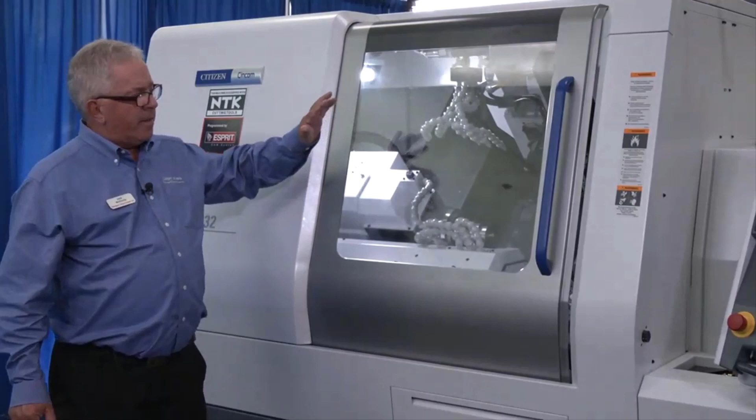Good morning. My name is Jack McGinnis with Marubeni Citizen out of Southern California. I'm here to talk to you today about Citizen's brand new model M32 Type 8 machine. The M machine has been around since the mid-1990s. For those of you who have been around for a while, the first thing you'll notice on this machine is a much larger machine. I'm going to go through some general features that are new and different from the older machines, and then we'll get into more of the concept of the machine itself.

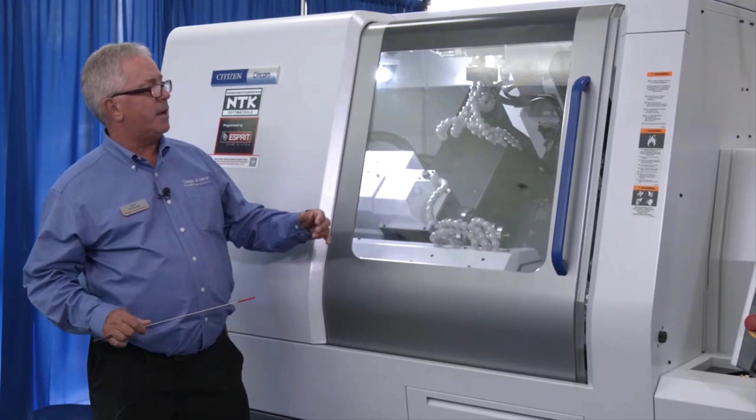The first thing you'll notice, again, much larger machine. Machine weighs about 9,500 pounds, much larger casting, much heavier than the old machines, allowing us to get into much heavier cuts and stability for nicer finishes when we're machining components. The other first thing you'll notice right out of the gates is a much larger door to access into the machine, allowing us to hit all sides of the machine very easily.

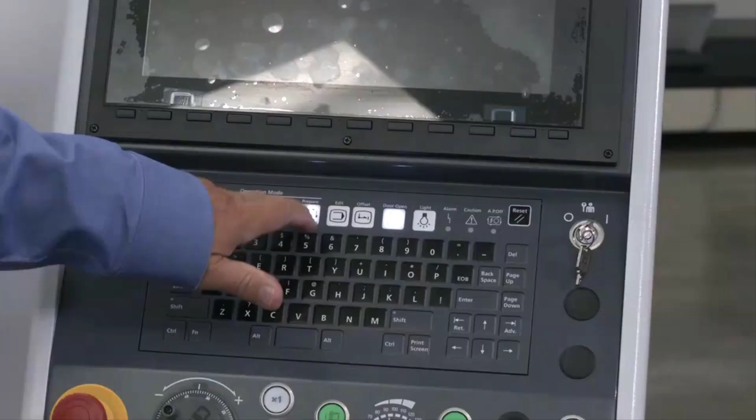In addition to that, our new turret now has a tang drive for the live tools, in lieu of the older gear-driven heads, gear-driven tools, allowing us to drive more power into the tool, getting more aggressive cuts. The control is a new Mitsubishi 850 control. It offers us a touch screen so we can get around in different areas and depths of the control much easier. Pictures, and again, very good access for our operators, much easier to do.

The M machines, as all Citizens, are sliding headstock machines. I think most of you are familiar with the Swiss type. Our headstock in this machine has 12.5 inches of stroke, meaning I can get long, thin parts machined on this machine, and we're going to go through some of the aspects of that as well. So we have a sliding headstock, outboard. I'll bring you in here a little bit.

We have our guide bushing, which is a support bushing. Again, we call it guide bushing. So we tighten that up around our material. And our tools off our gang block are set about 80 thousandths away from the face of that guide bushing. So we've got a very rigid setup. No deflection when I'm machining and turning.

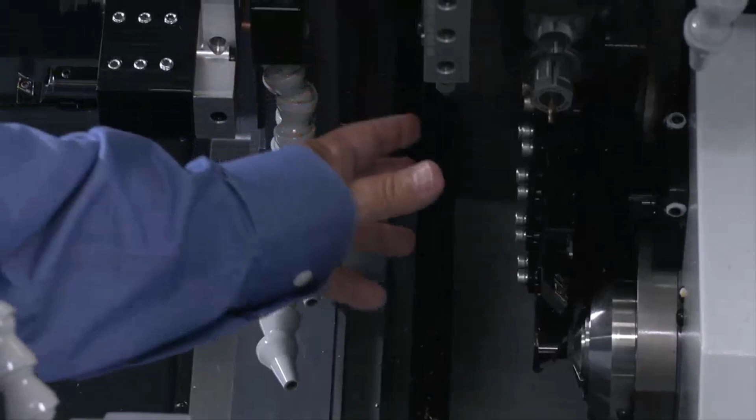On the gang block, we can put turning tools, grooving tools, knurling tools, back turning tools, cutoff tools up on this block. Now this gang block moves in what we call a Y-axis, and then up and down an X-axis. So we obviously have the Z-axis headstock, an X and a Y, so I can face, I can turn, do those types of operations. In addition, if I can bring you in here a little bit closer, we have X-axis live tools on this machine.

We have 4 standard. So again, with my Y-axis, I could have material sticking out here. I could simply walk across a part with the live tool, creating a flat. I have full indexing on this, on the headstock, so I could machine a square or a hex if I needed to.

In addition, with my Z-axis and my Y-axis, I can come down with an end mill, and I can G2. I can circle interpolate a boss on a part. Or if I had drilled a hole, I can go into the hole, and I can true up that hole. Really a full machining center capability up here on this machine.

So I've got my stick tools, we've got our live tools, and in addition, on the gang block up here, I've got a 90-degree head with 4 live tools facing front, 4 live tools facing back. This 90-degree block has a programmable B-axis, full B-axis. I can program this to any angle. So if I had angle holes, if I had angle flats on a component, I could certainly machine that.

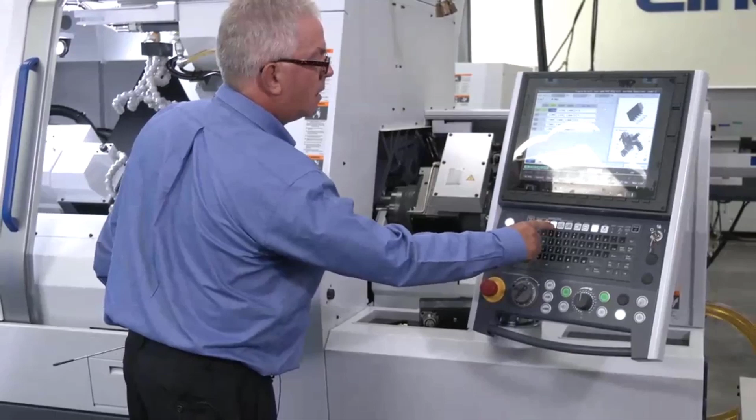This may sound somewhat complicated. I've been with Citizen since the early 1990s. Citizen's done a very good job at this over the years. They have simplified the programming of all this. I'm not going to get into a lot of detail, but we call the front side, the axis I just spoke about, $1. If I could bring that up. My main program, $1. Richard will get more into that in a few minutes.

In addition, on the M machine, we have a 10-station turret, live tooling capable on the front or on the back. We can put turning tools on this turret. We can put ID tools on this turret, facing the main or facing the back. The turret, in addition, if you wanted to load up for a family of jobs or many jobs, we have half indexing capability on this turret as well. So we have tool holders that have half index positions, so I could have ID tools off center, off half index, and really load this thing up if I wanted to.

With all that said, this turret has its own Z-axis, a Z2, has its own X-axis, up and down, and has its own Y-axis, giving us full machining center capability on this as well with our live tools. So I talked about $1. The turret is now programmed as $2. Very simply, what Citizen does, our cutoff face on our material is Z0. So we touch our tools off to the OD of the stock, and any of our ID tools off to the face of the material. The machine knows where that Z0 is. It also knows where all the tools are.

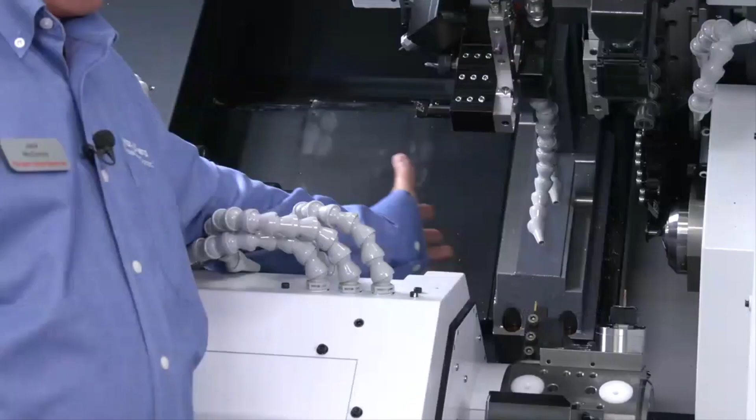I can then turn, I can do any machining center operations, milling, whatever I needed to do. I can then come in, move forward, grab the material with my subspindle, cut off, and I could use the tooling on the back side of the turret, ID, OD, live, or if the turret is tied up at the front, I've got additional stations up on top here. There's 3 stations, all live tool capable.

On the front here, we're showing a 90-degree live head, 3 positions. We can set that at an angle if we wanted to and do angle milling, angle drilling. We don't have a tool in our center, but I can put stick tools in here. I can put live X-axis tools in here. And in the back, we've got a 90-degree static block as well. So again, I can give you extra tooling capability on the back here, so I can separate my subspindle out and give you free time machining in the back.

So this machine is actually a 12-axis machine. Again, if I take a look, Z1, X, Y, B, C, Z2, X2, Y2, and Z3, X3, Y3, C-axis on the back. But again, Citizen's software, the architecture, simplifies all of this. We program to each section, and the machine knows where the faces, the cutoff faces are when I'm in the back spindle as well. And we've touched the tools off. The machine will take care of all those calculations for us. So that's basically how the M machine works and how we can process parts through it.

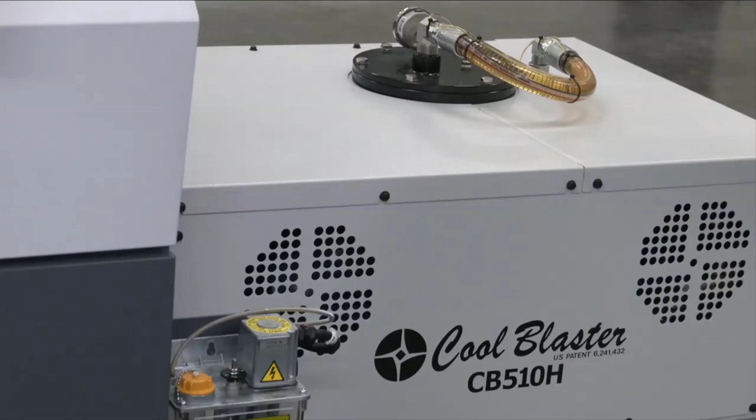We offer high-pressure coolant pumps. We've been making high-pressure coolant pumps since the mid-1990s. These have developed over the years. We now have 10 line pumps, 2,000 PSI. It's got its own PLC. We interface this back into the machine control. You can turn these lines on and off through your program, making it very, very nice and simple. We can bring those high-pressure lines into different areas of the machine.

Our gang blocks now support the high pressure, where we can now put tools in, and there are many tool companies, but NTK now supplies, I don't know if you can see this, guys, take a quick look. We can put coolant right in through the tool holder itself and have high pressure coolant come out right at the cutting tip. That offers good chip control, and it offers good lubricity on the cut. So again, we're trying to control that process.

So if we've looked at a component for you and we give you a 45-second cycle time, a 2.5-minute cycle time, whatever that might be, we want to control chips. We want to clear chips off of drills. We want to clear chips off of maybe our turning tools if things are getting balled up a little bit. We can do that with the high pressure.

In addition to that, if I've drilled a hole in the main side, in the front side, and I come in and grab it with my subspindle, cut it off, and I've got it in the back, and I'm working the ID on the back, potentially I'm packing chips back into the subspindle, which may eventually cause me a problem trying to close that collet. So standard on the machines, we've got a pneumatic line that comes through, we blast the air through.

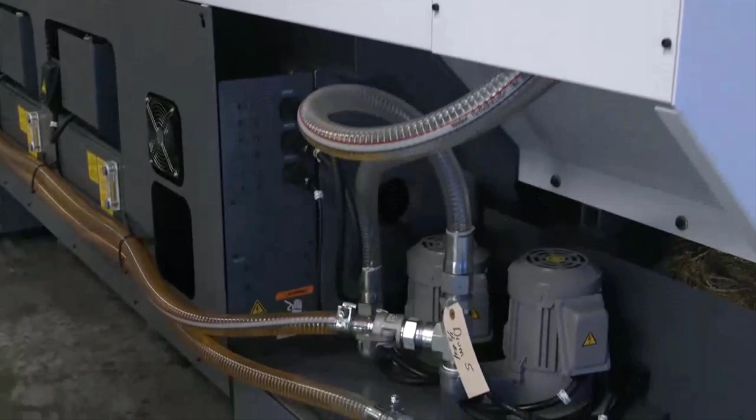In addition to that, we have standard 2 flood pumps in the back. Again, getting good coolant, good oil throughout the whole machine. We have that in conjunction, certainly, with the high pressure coolant. And a little further up, we've got 2 heat exchangers, one for each spindle. We want to keep the machine stable.

Again, we've got a big casting for stability and for aggressiveness, but we want to maintain the temperature of the machine, and we can certainly do that. Citizen's done that with our heat exchangers back here. Walk back around the front.

A couple other things I want to talk about, and this really relates to our entire line, not only the M machines. Citizen has done a good job over the years looking at applications and coming up with solutions. One of the things we offer are high-speed spindles, high-torque electric spindles. Again, we've been doing this for many, many years. A lot of tiny little medical parts we can get in, small little hinges and whatnot. We can get up to 60,000 or 80,000 RPM spindles.

These are listed on our price sheet as, if this makes sense, a standard option. So we've got them all set up. We have the interfaces all done. So we can just implement these with the tooling blocks to hold them and put them on the machine. You can buy these in the future as well on any of our machines if you have a need.

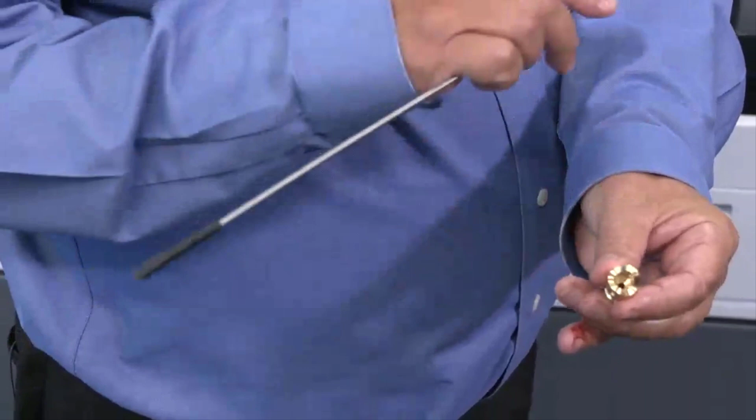With that said, we're going to show a video of a part. Where am I going here? Right here. We actually have a wave on this, and this is actually going to be a 5-axis move. Not many other machines of this nature can do a 5-axis move. We're actually going to move in C, Z, X, Y, and B, keeping this tool where we need to keep it to complete that wave on this part. So with that said, Richard, you want to go to the video?

As we said, we're going to show you machining a part on the M532. First off, let's show you what it looks like when we're doing a high-speed check function, checking for any errors in the program, such as syntax or G-code errors.

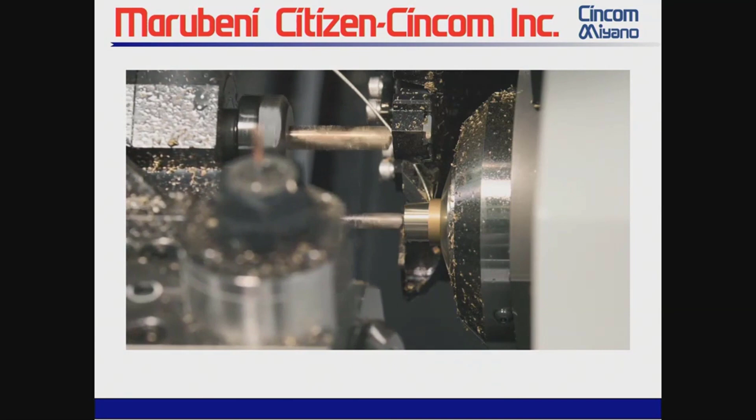We shift now over to doing a face-off move on the machine. Can bring in two tools, an ID and OD tool simultaneously, using axis superimposition, a very powerful function of the Cincom control. Does multiple cuts at the same time. Back tool block is turning the OD of the part, the back side. Bringing the ID tool up to the front side.

While that's going on here, we'll take a look now. We'll see this notching out as a rough notch, getting ready to machine a feature later on in the program. Setting a block on the backside, a live block to drill angled holes, fairly straightforward yet simple process with the Cincom control.

You are doing another roughing out, getting ready to move into the 5-axis machining mode. Drilling angled holes on a Cincom machine is a straightforward process. A couple of simple commands. Your local application engineers can show you how easy this is to do.

Starting the profile with a 5-axis machining, following it around. We start doing a little rough pass first. Come back around and do a finish pass right after that.

And finish that off. Now, something we're able to do, the holes that we're drilling angled on the back side, now we can come up and chamfer them utilizing the gang tool. It's on the front side, so the main side spindle. Maintain absolute positional accuracy. The back block, the B-axis block, can actually rotate 45 degrees on the back side.

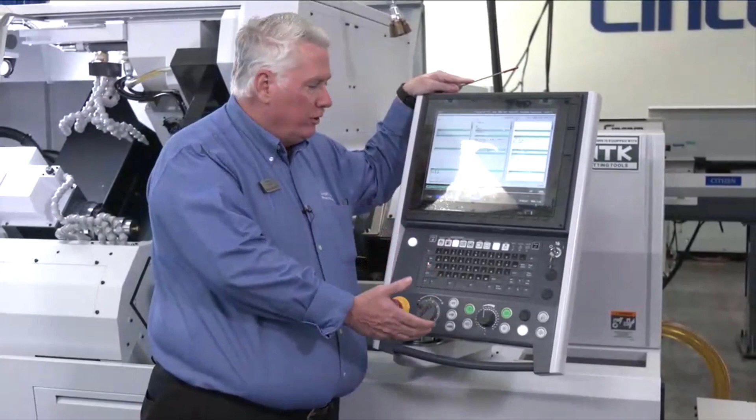Hello and welcome to our event. I just want to go through a few control differences with this new machine, the new 850 control, the Mitsubishi control. What really makes the new M different is going to be the touch control. You can touch between dollar signs very quickly. It's very quick to interact with this control.

You can see on preparation, many of the screens are very familiar with what you're used to on any version M, for that matter. What's going to be a little bit different here is you're going to have more choices as far as the turret. So this machine, the new M, has a tool library. The tool library quickly and easily defines tools that are associated with pockets on the turret. As you can see, the picture is illustrating exactly what turret holder you're talking about in that location.

This is twofold important because not only does it give you a visual representation of the turret holder, but it also defines positions, pockets in that tool holder, so you will no longer be required to put G50 shifts in the program as in past versions.

As Jack mentioned, the new turret tooling for this machine, the live tools are unique to the new M. With previous M32s, the tooling is compatible as far as static tooling and stick tooling that may be required for this machine. However, live tools now use the new tang drive that Jack showed you.

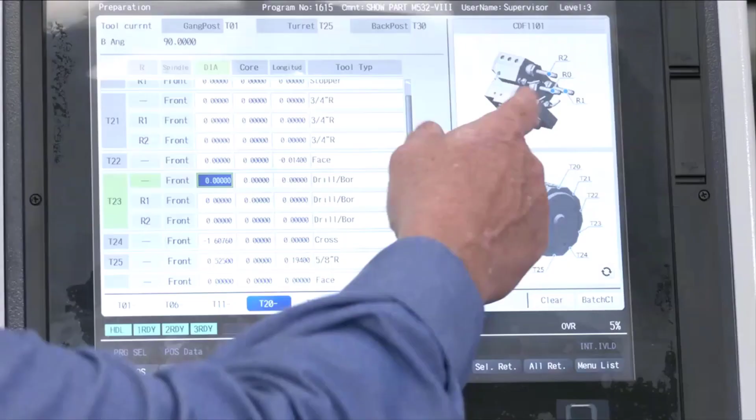As you can see with the new ID station holder, you can see all the designations for the different pockets, different tools. Whatever the tool may be, this is a standard X-Cross live tool. In this screen here, you can quickly identify the tool. You can scroll up the screen.

You can scroll down the screen and identify the tool, exactly what you're working for. At MC Data, many familiar screens on this screen as any Cincom. You're going to have your material OD, your bar stock OD, your positioning point, your cutoff tool. All these are very familiar with previous generations of M. No different with this machine.

Where you're going to see some differences is in here, and you're going to define your tools in here. All the tools in the library you can define quickly and accurately with no mistaking the picture for the tool that you're talking about. This screen is quickly accessed by scrolling through the pictures. You can touch on the picture and it shows you the picture of what you're using.

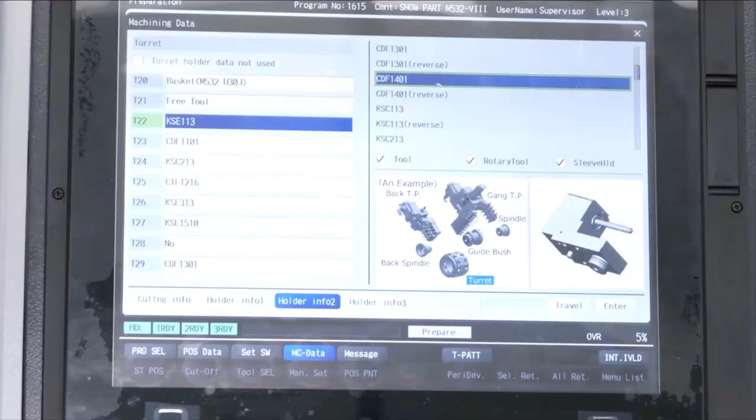The other benefit of this screen is, again, you have no G50 shift. The G50 shift will be put in the tool pattern for you, so you will not be required to put that into the program. As you can see, all the tool holders are defined. So for example, on this tool holder, there is no definition. If you want to use some special tooling you have, or if you do not want to use the predefined G50s in the machine, you can select this page, and this page will let you define the tool as you see fit in the program.

So this information also holds true for the back tools. As Jack was saying, we have this back tool that is set to slant. You have a few options for this tool. It could be set to cross, it could be set to face, slant. You could set the tool to free tool if you have some undefined tool in here, and it will make it nice so you can come up with any numbers you need to set a tool.

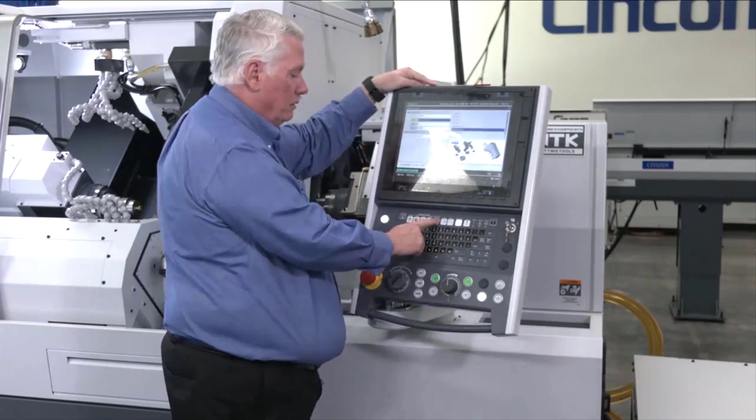As you can see back again in edit, what's really nice about this control, I've spent quite a bit of time on this new machine. We set up this part, but transitioning between dollar signs and placing the cursor is very fast. So I can transition and place the cursor right here, make edits that I need, and transition right to $2, right to $3 with a simple touch of a finger to the screen and make the edits that I need.

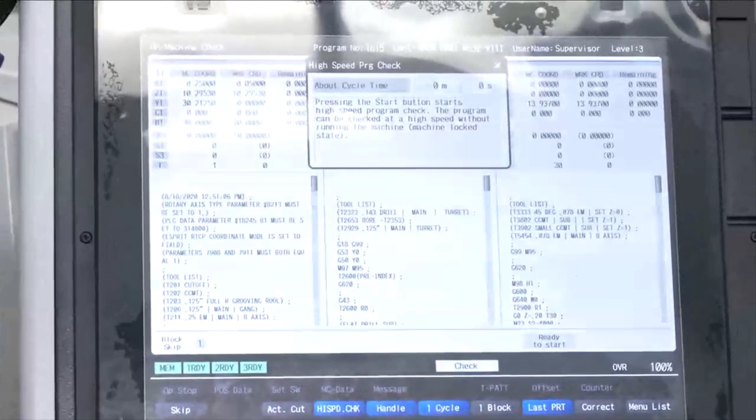The machine is very familiar again in program check. We still have program check, the high-speed check function that is standard on all Cincom machines. As we are familiar with this function, it allows the program to be checked in the background for syntax errors, syncing errors, and various other errors that may be caught prior to actually running the machine. Everybody's pretty familiar with the high-speed check, and you have the handle function. The handle function is the same, and it allows you to crank through the program.

And especially on the M, there's a lot going on. You have $3 signs, you have a lot of axes moving at the same time. So the handle function is very nice to crank through the program. We're going to have another demonstration of that shortly on the L video that's coming up in the live demonstration. But I can't stress enough with the handle, it's very nice to crank through the program.

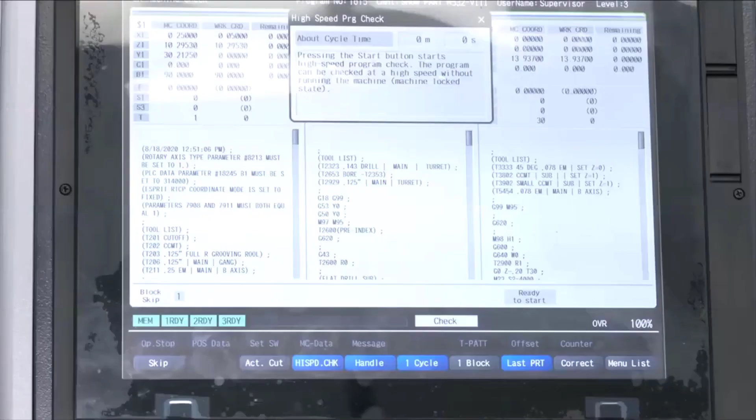You can crank through a spot in the program that may be unfamiliar or maybe coming close to interference. You can actually crank the handle backwards, removing the tool from the interference zone, hit reset, escape out of there, and make adjustments. You can also correct the program on the fly by pressing correct, and this will allow you to make minor edits on the fly. If you see a syntax error, maybe the decimal's in the wrong spot, maybe there's a number wrong, you can quickly and easily make adjustments as you need.

So even though this is a brand new Model M, all the screens are very familiar. All the screens and all the tool setting functions are the same. Still sitting on top of this Mitsubishi control is our Cincom software, making it very familiar to any previous M. If you ran an old M2, M3, M4, you can walk up to this machine and still make it work because all the screen functions and mannerisms are still the same, even on this brand new machine. I really like the new touch screen and the interface because it makes transitioning between screens and the data very quick and effortless.

All the safety built into the machine as far as cranking the handle and cranking through the program make it very nice. So Citizen has, with our Cincom software, we tie the programs together, as Jack was saying, $1, $2, and $3, with our G600 codes.

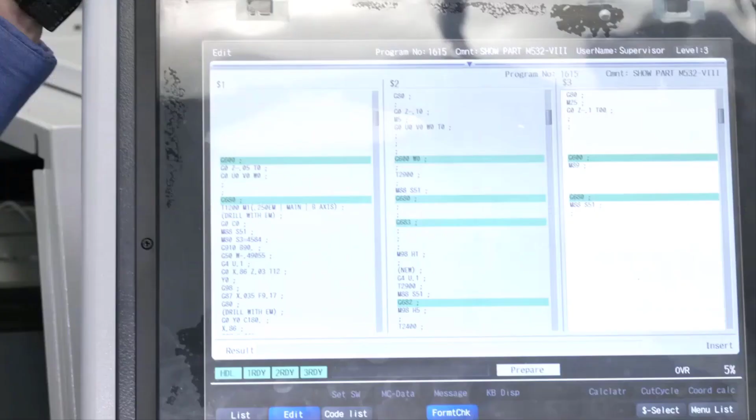So with the Cincom machine and the Cincom interface, the machine excels at this. It makes a very complicated machine with multi-axis very simple to tie these different areas together with simple G600 codes. And as you can see, I can scroll through this program simply by swiping up on $1.

I can place the cursor wherever I want. If I still want to page down with buttons, I still have buttons available that I can scroll down. And as you can see, more G600 codes, G620.

And in this mode with sync display, it makes it very visual for somebody to look at the screen and quickly recognize the programming, how it looks, how it's supposed to look, and make sure that your queuing is set in the proper order. It makes it a very visual, very quick access to the program.

So again, to recap with the programming, with the G600 codes, when we come out we train very well with teaching the codes and making sure these codes interface with the machine correctly and that they're understood. So basically the codes are meant to make the machine have very specific functions at very specific times, to making the machine easy to program, to making sure the machine is doing exactly what is required by using these basic codes.

As with all M's, last part programming is a very good function. As you know, with the Swiss machine, typically when the machine stops, it has an incomplete part in the subspindle. With last part programming, it allows us to complete one complete cycle and make one complete part. You're no longer left with an incomplete part in the subspindle.

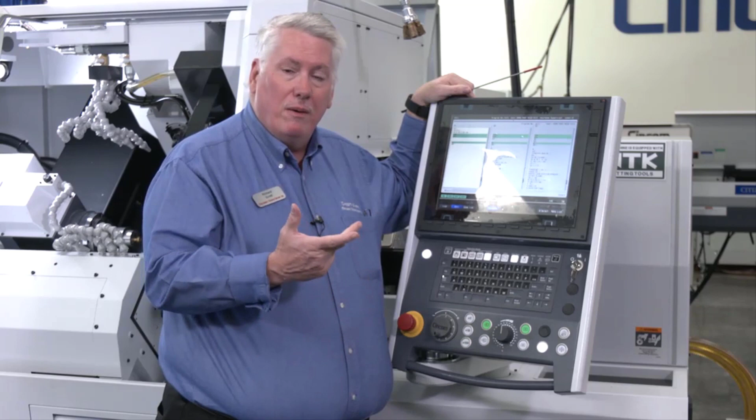So this is a function that we use in our programming technique for programming the M or any Cincom machine for that fact, that we can make last part programming work and you will have a complete product at the end, making setup times faster, making it more productive, and saving money because you're allowed to set up one part, get one part done at one time, one complete product.

A few more screens, back to program check as I explained the high-speed check function. A lot of the other pages like offset are very familiar, and they're also touch interactive. You touch the offset page that you want, you can see it's highlighted, you can make your direct offset to these pages. Very simple. And all the pages here to the side, again, all touch, making it very fast, saving tremendous amount of time transitioning between pages setting up this machine.

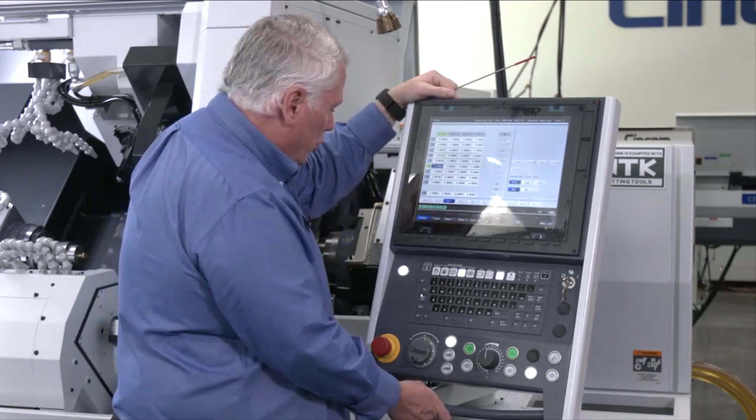As Jack said, the new M is convertible to non-guide-bushing mode standard now. The drive shaft is easily taken off and put back onto the machine, making the machine go into non-guide-bushing mode relatively quickly, effortlessly.

I just want to show you the Tang Drive tool again, because this is the tool that is unique to this machine, to this new M, with the Tang Drive. I was really excited about the Tang Drive system that came out because with this tool in the drive station, it doesn't bleed energy anymore. It's only driving the tool that's in the pocket, that's in the active station.

You don't have drivetrain wear on turning tools that are no longer being used. So you may have the turret loaded up with tooling. However, only the tool that's in the active position is the tool that's turning, saving tremendous amounts of energy and power.

So the main spindle, sub-spindle in this machine are 10 horsepower. The live tools are almost 3 horsepower on this machine. So the machine has tremendous amounts of power, especially with the new Tang Drive. Again, it doesn't bleed energy off as other machines have, and makes it a more robust situation for turning, drilling, milling, whatever the case may be.

So I think we're going to take a few moments now for any questions and answers that you may have. I know Jack touched on the high pressure coolant. If you guys have any questions, it's going to be a good time. I would like to just talk for a minute again about the high pressure coolant. As you guys are aware, typically inside the machine, you have high pressure lines that would be sticking down from various manifolds in this area.

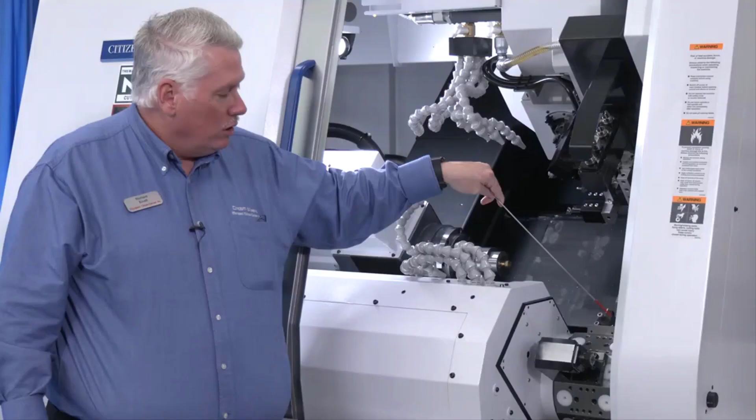Turret tooling has the capability of high pressure through the turret. There's a plunger in the turret that allows direct coolant flow to the individual tools, cutoff tool, some drilling stations, and some tooling through. So it's very neat. It's seamless. You won't even see that it's happening. It'll feed the turret directly with high pressure coolant.

And as you can see, the manifold here for the back ID block. You could plumb high pressure lines through here. You have some ports up here for allowing pressure through. It's a very nice setup, very clean. Allows very easy adjustment to make sure that the coolant is flowing where the coolant needs to go.

So I'm really excited about this new system with the coolant. NTK was a big part of this tooling that we used on this machine to get the coolant through the tools. And again, the pocket where you place your tool has a small hole that lines up with the hole in the gang tool block and allows, again, direct access.

So that also means if you do not have a tool like that, you can still run the manifold as you have in the past to give you direct access to coolant at the tool tip, no matter what tooling you use for this machine.

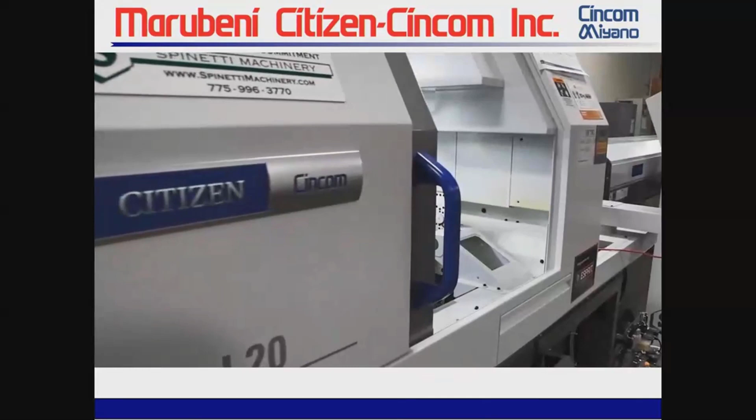Now let's look at today's demonstration. We are pleased to have you with us today as part of the Marubeni Citizen-Cincom IMTS Demo Days for 2020. Today, we will be demonstrating a gear hobbing application on the Citizen L20 Type 10. A little about the machine. The L20 Type 10 is a 20 millimeter machine with a 25 millimeter upgrade option. It has the capacity of up to 34 total tools and has a Y2 axis on the sub for additional machining capability.

Some features of the beveled gear project. We are using a gear hob attachment from Marubeni Citizen-Cincom New England division. We are using the LFV function, or low frequency vibration. That's part of the latest in the Cincom technology. The gear cutter is a special 3-tooth cutter from Gen Swiss.

The goal of the project was to successfully make a pair of identical bevel gears to mate together in a housing designed by the customer. Originally, the customer was making a single gear in 5 operations, whereas we are now making the gear in 1 complete operation.

This project is this beveled gear, which is not a common thing to do on a screw machine. This particular beveled gear, instead of being at a 90 degree, it is at a 57 degree, which is even more unusual to run on a screw machine. This particular beveled gear required us to use this 3-tooth cutter, which acts more like a single tooth cutter than the normal cutter that we would use for a spur gear.

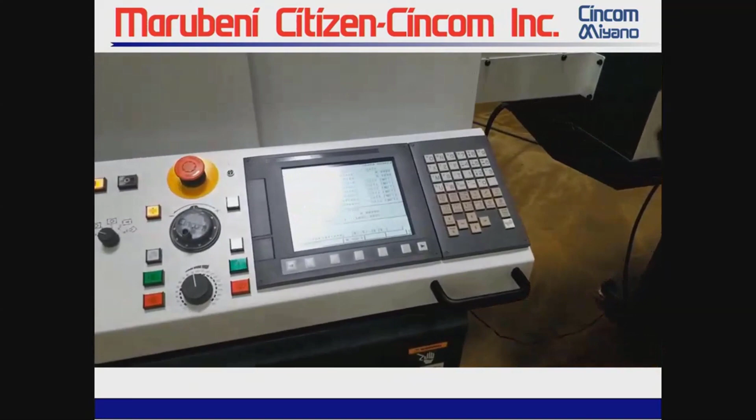Now with this type of information being sent through the program, if the operator or the setup person forgets to send the bar loader info, the information will be sent by program. We are also working on having this information of parts remaining and pusher positioning showing up on our operator screen.

Another new feature that we'd like to add to our bar loaders is last bar sensor. So if the lid is closed and the machine is in automatic and the last bar is loaded into the channel, now with the lid still being closed, we have a warning light blinking that states that there are no more bars left in the bar loader. Please be on the lookout for this option and Ethernet connection between the C320 and the A320 in the near future.

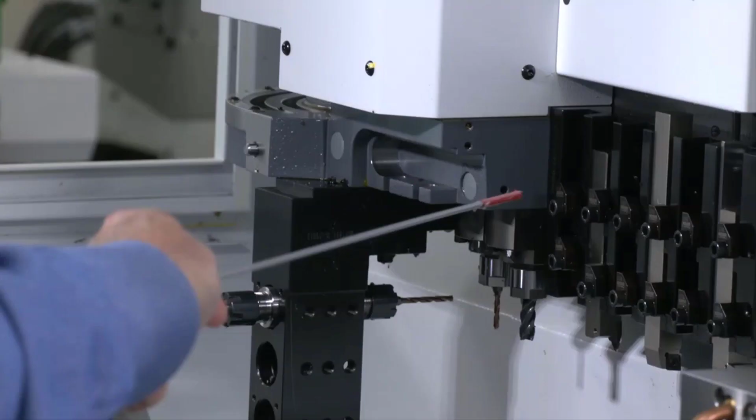Now, the big difference between the L32 Type 8 and the L32 Type 10, which is what we have here, is that as opposed to having driven spindles, we have a back block with 5 positions that are static, so there's no live tooling in the back. We still have a gang slide similar to this, with 6 positions and 5 driven positions.

Over and above that, we have an additional unit on the back, which enables you to plug in what we call a driven dog leg, and that will allow you to put motorized tools and utilize them on a predetermined angular setting, okay, which is done manually. On this particular machine, on the sub spindle, we have a 3 horsepower continuous duty rating motor, and it's 5 horsepower, 30-minute rating, 8,000 RPM.

And on the sub spindle side of the machine, we have an X, Y, Z, and C axis that you can work with, okay? On the primary side of the machine, we have our guide bushing side, which does have positive pressure, which enables you to utilize high pressure coolant without having to worry about any foreign materials or matters getting into the guide bushing itself. We also have 6 turning positions and 5 driven positions to do your cross working.

Now, on the Series 12, everything is the same as this, but in addition, you will have a programmable B-axis on the very back side, and I'll show you where that comes in a second. I'm going to do a brief walk around on the machine. Let me first start by saying the casting is big, rigid, and thermally stable. We have hardened ground ways, and we have roller packs on those. So the end result is a machine that is extremely quick, accurate, and thermally stable. We're traversing the axis at a rapid rate of 32 meters a minute.

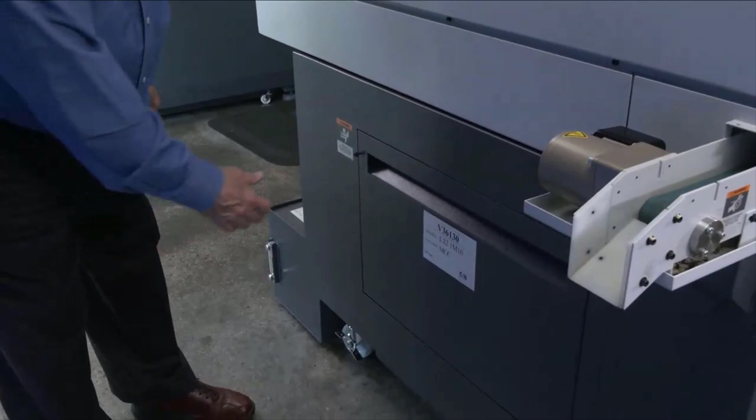Okay, so with that said, I'm going to go around and show you a little bit about the machine. All of the L family comes with a part conveyor. Okay, we also have here a chip bin, and the chip bin is where we extract the chips after the parts are manufactured, or we can take this out and put in a chip conveyor for unattended style manufacturing.

Around this side here, we have a fine particulate capturing device. So as the coolant flows through the machine, the fine particulate matter goes into this bin to keep it segregated from the coolant. We also have here a spindle cooler, which helps also in stabilizing the machine. Important. Like I said, it's big, it runs fast, and it stays stable.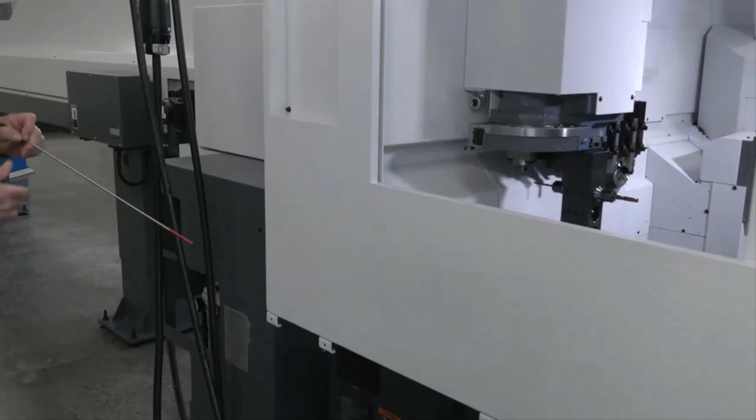Back here we have the guide bushing, where we actually will detach the belt. We can take the guide bushing out of the housing and convert it to non-guide bushing mode. Okay, the difference between one and the other, if you're running in guide bushing mode, you can machine parts up to 320 millimeters in length.

If you machine in guide bushing less mode, non-guide bushing mode, you can machine parts up to 80 millimeters in length. Okay, the single stroke of the headstock is roughly 12 inches, and the diametrical capacity is 1.25 inches, and there is a 38 millimeter conversion kit, which enables you to get up to about 1.49 inches diametrically.

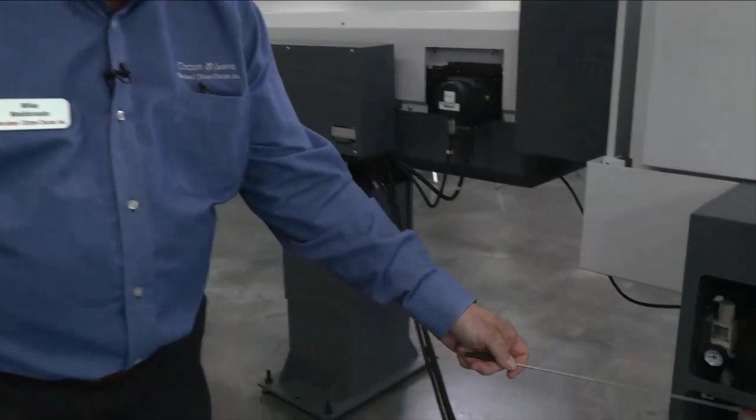Okay, this is the pneumatic logic panel, which controls a lot of the functions of the machine. And then back here, we have rollers that are used in stabilizing the bar stock. And this is important because when you're trying to hold tenths on a diameter, this helps you a lot, especially if you're running in non-guide bushing mode.

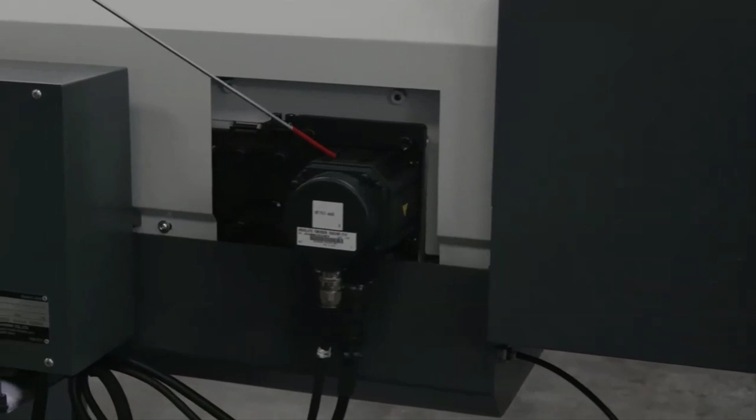Okay, here we have a servo motor, which is on our CAB bar loader. The CAB bar loader, what makes it unique, it's an additional axis for the machine, and basically maintains the positioning accuracy and synchronizes with the headstock. So everything is always moving and conveying back and forth with their position. So we always know where the bar and the headstock are.

Okay, this also, by the way, is the logics or the brains of the bar loader, where it controls the different functions of the bar loader. So I'm going to walk around now the bar loader and meet you back on the other side, and we'll continue the discussion.

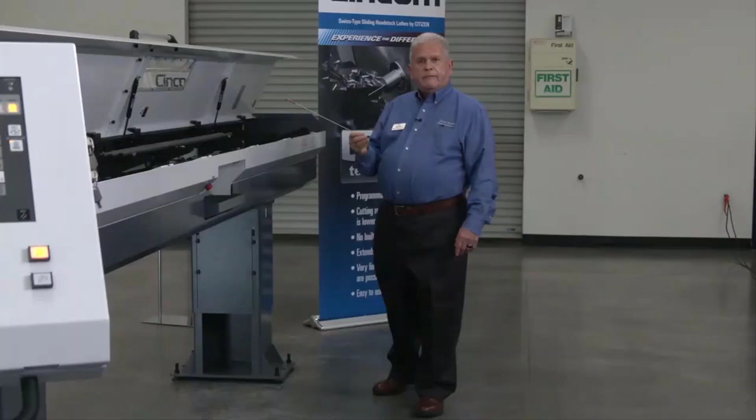Okay, now I know that a lot of you folks have automatic bar loaders in your shop, but for those of you who don't, I'm just going to recap quickly what it basically does. This maintains the manufacturing cycle continuing until the bar stock runs out. The bar stock is put into these channels here, and the number of bars may vary because of the diametrical dimension of the bar. As the headstock signals for a new bar, basically the remnant is pulled back and it's deposited here in the remnant retract bin.

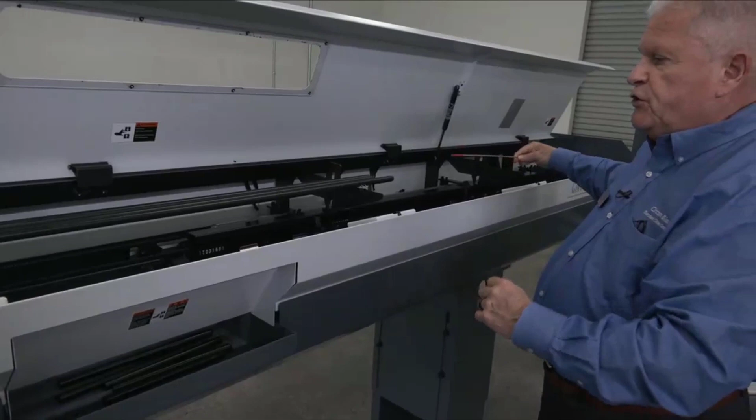Once it's sure that the remnant is released, the pusher tube comes all the way back to the home position. The channels open up. The new bar drops into the channel. The channels will then close down over the bar again. The pusher tube comes over the bar with a collet, and it pushes it into the work area, and we start the manufacturing process again. And it will continue to do that until such time as you run out of bar stock.

Okay, so with that said, we'll go ahead and go towards the front again, and I'll get a little bit more in detail on the machine. Here we go.

Okay. Now with these machines, one of our companies called CMA manufactures all of the attachments for us. And what that does for you basically is it enables you to be sure that any accessory that you put onto your machine will fit without any problem. The other very important thing as far as Citizen goes is that you have a single source responsibility for everything from the bar loader to the chip conveyor.

So all you have to do is make one phone call, whether it's a bar loader, control, headstock, machine, programming, anything that you may have a question on, we're there to support you. Okay, we have lifetime training. And again, it's a one-call deal. You just basically call in and we'll take care of the problem for you.

Okay, now, as far as accessories, we have a large array of accessories to help you change the configuration of the machines to better suit the part that you're going to manufacture. Because the whole idea behind these machines is to produce the part in the fastest cycle time. So what we do is we try and have a ratio of 50 to 50%, which is ideal. Obviously, we can't always get to that, but that's what our goal is.

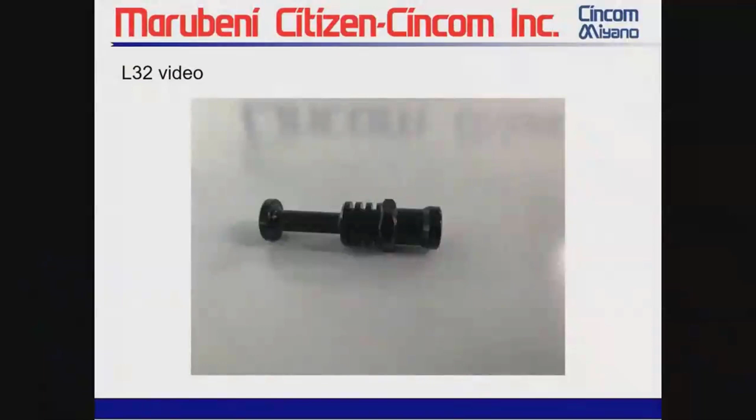Okay, so with that said, can we roll the video on the part, please? As Mike told you, we're going to be demonstrating turning a part using LFV on the L32 Type 10. Notice the large workspace area, easily accessible to get to the tools. So we're going to face off. We're going to start with an ID move. Note how small the chips are coming through the drills instead of long stringy chips as you would expect. They're very small, very controlled. Also using axis superimposition so we can do 2 drills at the same time.

Turning, same process, very controlled chips. As you know, machining plastics can be very problematic, creating a real bird's nest. This isn't only useful for plastics, it can be used in all types of materials. See how the chips are just flying off there, very small, very controlled. This works really, really well, as you'll see in a second with grooving. Grooves can be very problematic with chips wrapping up in the grooves, difficult to get rid of them.

Cutting down. The Type 10 and 12 now have LFV on the subspindle side. You can see here, controlling the chips as we do an OD turn. Not a problem with long stringy chips wrapping around the part. Very controlled as they fly right off. ID boring, same situation. Very controlled chips. Not getting long stringy chips. Not going to have a problem with chips being wrapped around the tool when the parts are removed.

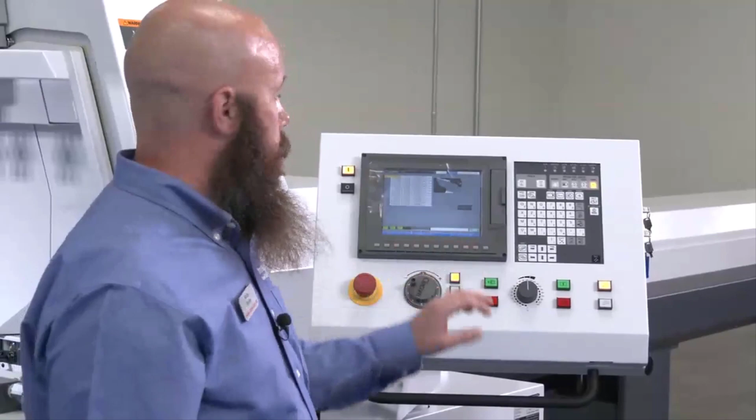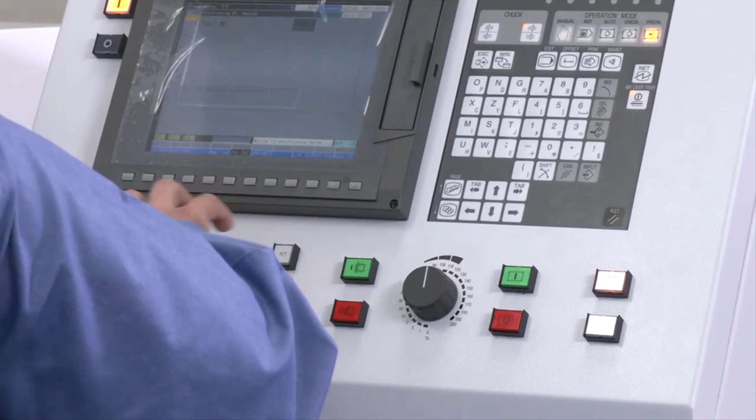So right now, I'm going to install a gang tool at position 6. So, it's very easy to work with. I'm going to move the cutoff tool up. And one of the neat things about this is that I can actually move the material in and out. I don't have to go to the manual page if I want to get it back even with the guide bushing. Very intuitive.

I'm going to call it tool 6. You notice that there's a graphical display here, probably too small to see, where it actually shows you what position you have highlighted. I'm going to call that station to position. I'm going to jog the material out, again, not having to go to the manual page. And I'm going to perform an operation called man set. And I'm going to select the option diameter.

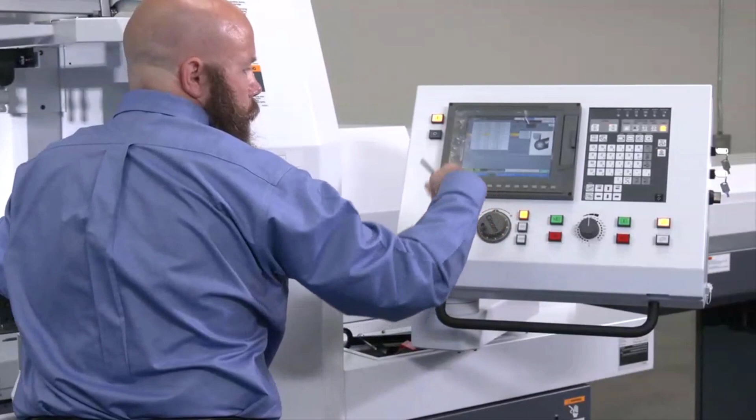The gang plate comes down. And at this point, I simply set the tool to the top of the material. Got to hand tighten the screws, and again, depending on what you're doing here, the machine knows which axis you want to move. Move it off the material. Tighten the clamp. That tool is now set. Top of bar is what we call it.

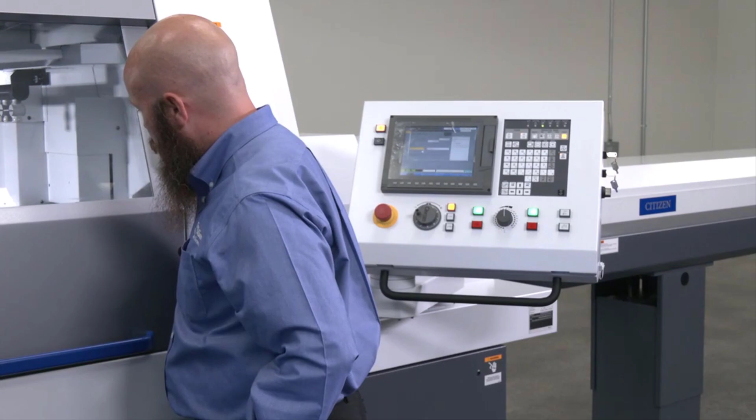So at this point, I'm going to call up the cutoff tool, which every program starts with. Jog the material out, and now I'm going to perform a cutoff operation. All done within the preparation mode. This operation can be performed at any gang tool position, so if you wanted to do a face cut to check center, there's other options for setting center as well.

So at this point, I do what's called a start position. The headstock drops back to the machining length, which is your total amount of material used to make the part. So let's just pretend that that was the last tool that we set and we're ready to check this program. Cincom offers an operation mode called program check. It's an awesome safety feature. It provides multiple ways of going through and verifying your program, even before you actually cut material.

One thing that's also cool is just in the basic edit mode, the control will catch syntax errors and highlight them. So if you have like an extra decimal point or something like that, they even give you a description of what the issue is.

Going back to program check, we have a mode that's called high-speed check. And what that does is it simulates the part program. It runs the part program, but the machine does not actually move. It just runs through and checks for things like sync issues. If you have a queuing code that's off, or if you have interference in G41 or G42, it will catch it in high-speed mode. So, with that being said, now it's running through the program.

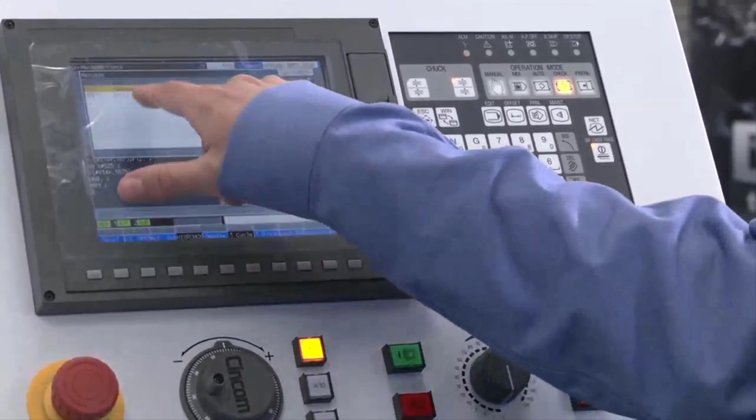So it comes up with an alarm, compensation interference, and $2. So at this point, hit reset, go to edit, select $2. Well, it's not showing it. So anyway, I know what the issue is here, is that I have too big of a radius offset. Go back to program check. Let it run through again. We'll do this until it gets all the way through to the end of the program.

Here, we see that we have a sync code that does not belong. Again, it makes it very easy to catch things before you're actually cutting material. It's a nice, safe feature, potentially save you a lot of money. Go back to edit mode. Go back to program check. It's going to run through again. Let's run through the whole program. Simulation has completed. Now, the next step is actually cutting material.

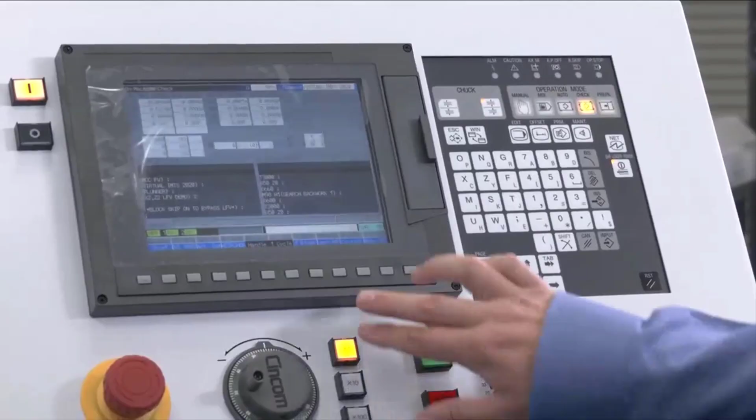Cincom Control offers a handle feature in program check mode to where you can actually handle through the program. As you rotate the pulse handle, it advances through the program. You can adjust the speed at which it moves using your buttons here. What is a very awesome feature of this is that as I'm running through the program, I can reverse, I can go forward, I can let it off, no movement is happening. I have complete and total control of the advancement of the program. Again, if I see something I don't like, I can reverse it.

Another great feature is correct. You can actually correct on the fly. Single blocking it, going it through, looks okay. I see something I don't like, so I go to correct. I go to the issue. I've just made an edit while the program is running. I go back to normal operation. Finish that block. Now I can continue with running the program.

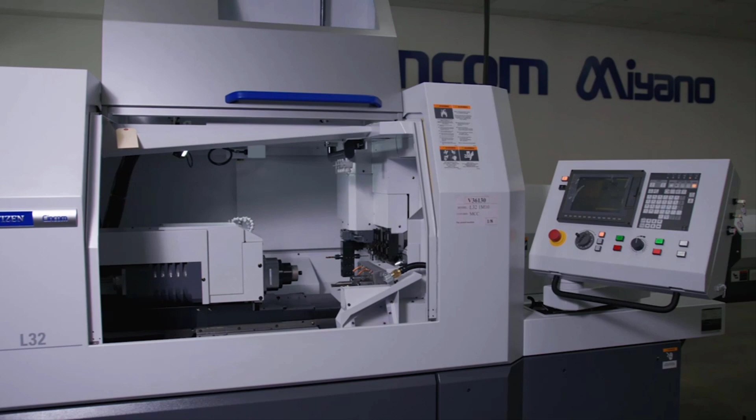I want to spend a few minutes just talking a little bit more about the LFV, the low frequency vibratory cutting that was mentioned. Richard, if you could just pull up the next slide for me, please. Okay. LFV is a Citizen chip breaking technology that was developed and introduced in 2014. The process is actually an axis oscillation, which creates an air gap in the cut so that as it oscillates, the chip is broken off. There's 3 modes in this function. It oscillates with the number of oscillations per the revolution of the part. There's a number of revolutions per oscillation, and it's also effective with threading.

And it's possible to do 2 axes simultaneously. We can also use this process on angles and radiuses. And it does work very well on tough materials. We demonstrate on plastic just for the dramatic effect, but it works very, very well on all sorts of materials, stainless steels, alloys, aluminums, titanium. It's a very good process. Next slide, please.

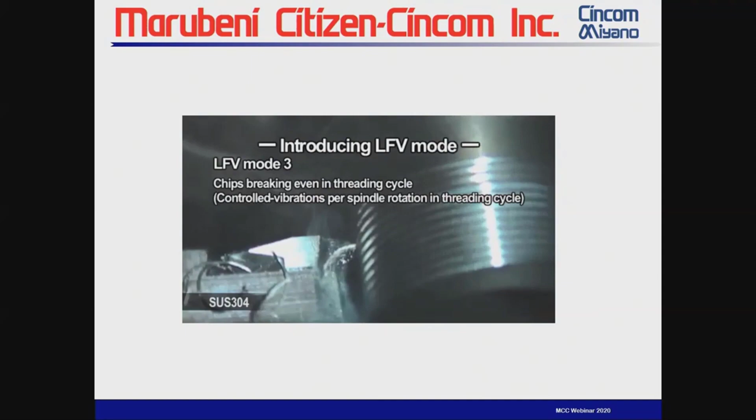Okay, one other thing I forgot to mention that I'd like to say is that the LFV is not just a software turn-on option. These machines were all purpose built with the hardware in the machine to accommodate this low frequency vibratory cutting. It is actually built right into the machine to give you added strength, and it will not diminish the life cycle of the machine at all. So this is not just a software option, but it's actually built right into it.

Since we are discussing the L32, I would like now to go to a video that our friends at Concentric have done showing a special process of eccentric turning on the L32. So let's watch that video right now.

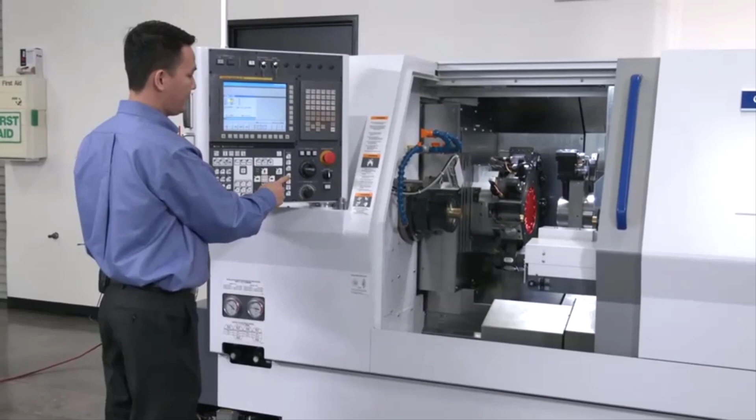So it's very quick. The same thing in the sub spindle: if I command 2,500 right here and hit start, it also gets there very quickly, just in a second, like that. And then we can stop it. Let's look inside the machine. The machine has 7 axes. I can show you right here.

The main turret can travel in and out with the X1 axis, up and down with the Y1 axis, and side by side with the Z1 axis. The sub turret is a stable turret. It will not move; it can only index to a tool in order to cut. But the sub spindle can travel side by side, or forward and backward, with Z2, and this way with X2.

Both spindles have full C axis capacity that you can command down to 0.001 degree. That's a very good advantage, since you can use milling interpolation, which comes standard with the machine. We also have helical interpolation. It used to be a feature you had to pay for, but like a lot of functions, it's now standard with the machine as well.

So with a machine like this, it's running so fast, and when you index the tool in rapid mode, everything becomes very fast, just like the main spindle. The X2 and Z2 can travel 20 meters in just a minute. Just imagine, that is really fast. But this machine also has a lot of safety features.

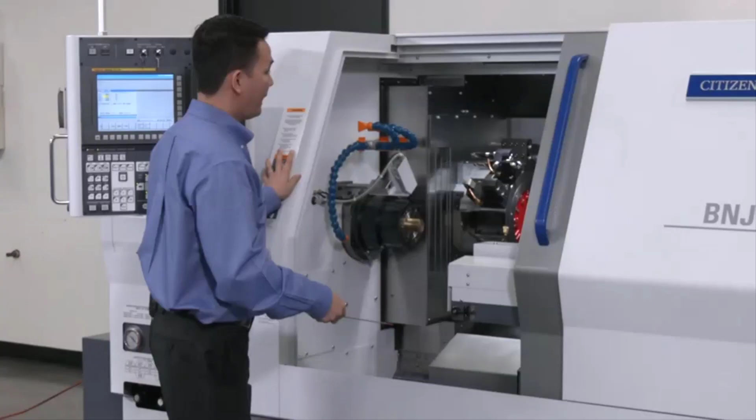Another thing that's really good with this machine is it comes with different types of coolant. So we have the flood coolant right here for the main spindle, and the flood coolant for the sub spindle is all separate. You can program it on in head one or head two. It's all separately controlled by the M code. Another thing is inside the sub spindle right here, we have the flood coolant that goes through the sub spindle. It helps you flood all the chips out, so the sub spindle always stays clean.

Another thing is the high pressure coolant that we can have through the turret right here, and it has 150 psi. It helps you blow all the chips off the tip of the tool when required. Sometimes you turn some material that's very sticky, and then it might stick on the tip of the tool. So that way we can make sure that everything goes right.

So one more thing that I want to mention right here, the machine comes standard with the part catcher right here, and then also the part conveyor, and then also right there, what we call the chip conveyor. So everything is standard right here. You buy it and then you get all of it with the machine. You don't have to purchase any options at all.

So that is all about overall about the machine. So the next thing I want to go over is all the features that we have here for the machine. So the machine has a very good feature that's right here. You can see the icon right here. It can access the page right here, and the page right here contains all the good features that the machine has. So the first thing I want to talk about is the machining data.

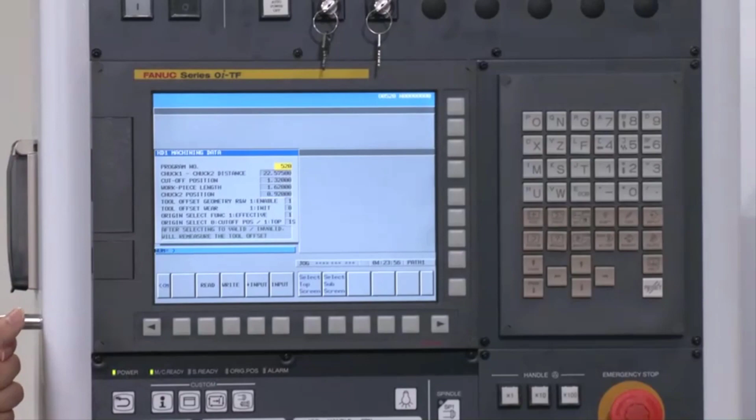So it makes everything way easier by setting everything zero at the main chuck right here of the main spindle, or in the sub spindle as well. Everything is going to touch up on the Z axis right here and here. Another thing is we can have a setup quick change, very good for this machine. So basically you have lots of programs that ran months ago, and then you want to load it back in and run it again.

So all the information you fill out right here in machining data when you prove out the machine, this information will go together, it will travel with the program. So the next time when you load it in, all the information right here will go back into the machine, and then you don't have to worry about anything at all. It will remember all the things on the tool that you used last time.

So the next feature that we have, and again, we're going to go back to the custom page right here, we call it the thermal revision. So the thermal revision right here allows you to enter the information whether you're going to use the coolant base or the oil base. So throughout the machine, we have a lot of thermal sensors. So it gives you the ability to control the machine growth. So when the machine heats up or cools down, it will not give you a problem.

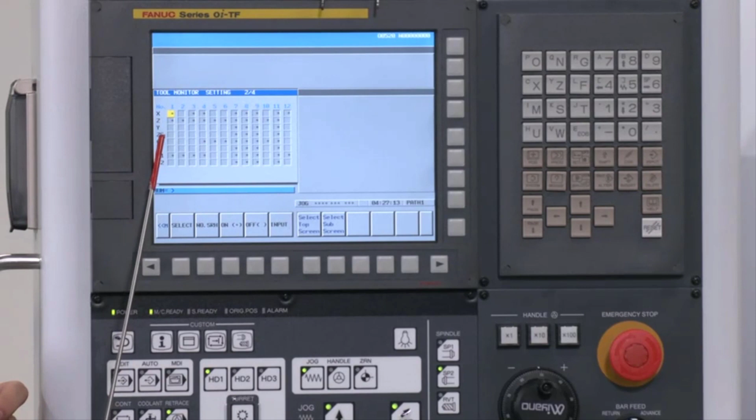So another thing right here in this page, the tool monitoring will allow you to record different axes as well. The first axes are going to be X, Z, and Y. And then also with C axis, when you're using live tools, it will let you record the load on the live tool also. And then spindle 1 or spindle 2, whatever spindle is involved in cutting, it will record the loads as well. And it gives you the ability to record up to 32 tools. So that's a lot of tools for you to record and keep track of.

One thing right here I want to mention is the offset. So with the offset, we can make adjustments with 5 digits after the decimal point. So it's a really accurate machine.

So we want to make the adjustment up until micron. So this is how good the machine performs. Whenever you put a 1 micron adjustment, the machine actually moves 1 micron, exactly what you command. So it's all the good features that machine has right here.

Next thing I want to go over is the program a little bit right here. A lot of people see, okay, this machine has a lot of tools, it's really crowded inside right here. As you can see, we have a lot of tools on the turret. We have double holders, we have everything in here. So it's kind of a really crowded machine. So a lot of people get scared because how can we control it, how are we going to program it to make sure nothing unexpected happens.

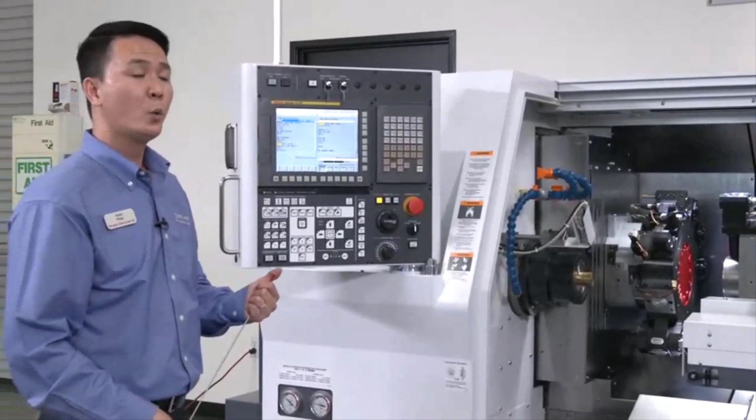And then sometimes we have the G530 mode, which is the synchronized mode. It allows you to use the main turret to work simultaneously for both spindles. So with the programming and all the queuing code, it makes everything way easier than you think. It makes more sense in the way that you control. If you call the tool, it's going to react right away with exactly what tool in what mode you want to run. So like I said, very simple machine, but good performance, easy way to program.

Heavy machine, handles big cuts with a lot of tool ability. We have a lot of holders, variable holders for you to pick, either single holder, double holder, triple, whatever you can think of. And also the same thing with the live tooling. We can have live tooling that works for the main spindle only, or we can have double live tooling just like this one right here. It can use the live tool to work for the main and the sub as well.

So this is all the information that I gave you for the machine. And next, we're going to have a video that we already recorded to show the machine performance. So this is the next video we're going to see.

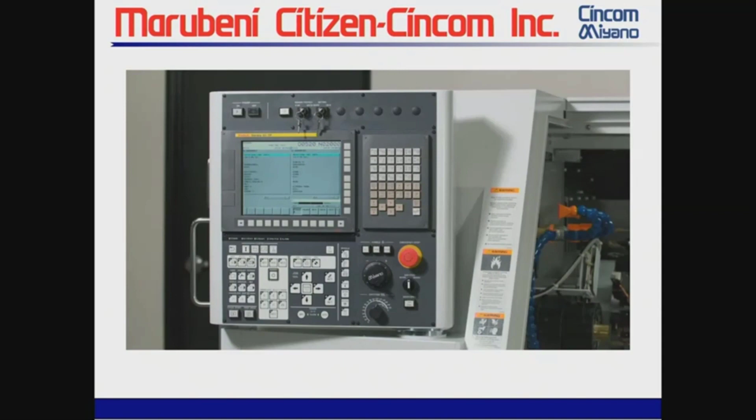Take a look now at this part that we're running on the BNJ-51SY6. Note the compact size of the machine, fan and control. Both spindles come into operation for simultaneous turning, front and back side. Turning the OD on both spindles. ID work on the front side while we finish turning on the back side. The live spindles are 6,000 RPM high torque spindles, to do some heavy duty machining this way. Right now we're just chamfering on the front side.

What we're going to do is simultaneously work front and back using superimposition. To save time, we're drilling through holes on both sides in different positions. Axis superimposition allows the machine to know where the positions of each spindle are relative to the other. Now doing a boring operation on the front side. Backside drilling, utilizing a boring bar here.

Thread milling on the backside. As you can see here, C-axis. Front side, we're using mill interpolation, again using the C-axis. You'll see this right here.

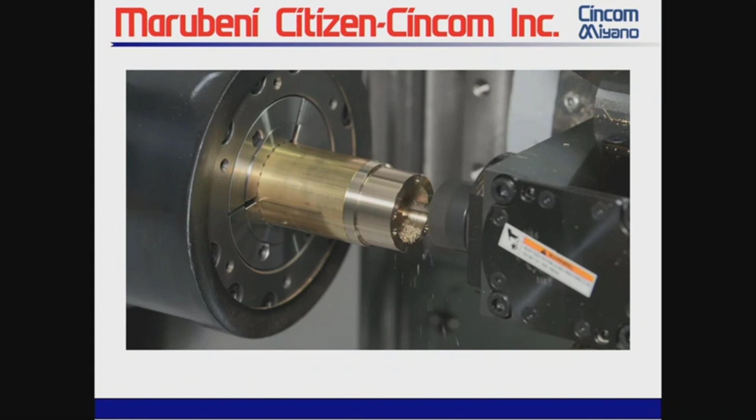Part eject into the parts catcher, standard feature of the machine. Note the unique design of this back turret, which allows for clearance, faster tool change times, faster pickoff. Part picks off, spindles sync. Machine cuts down, ready for pickoff. Cut it off, retracts the part.

Okay, I'd like to have Jack McGinnis now come up and show a few more features on the BNJ and be available to answer any questions that you may have.

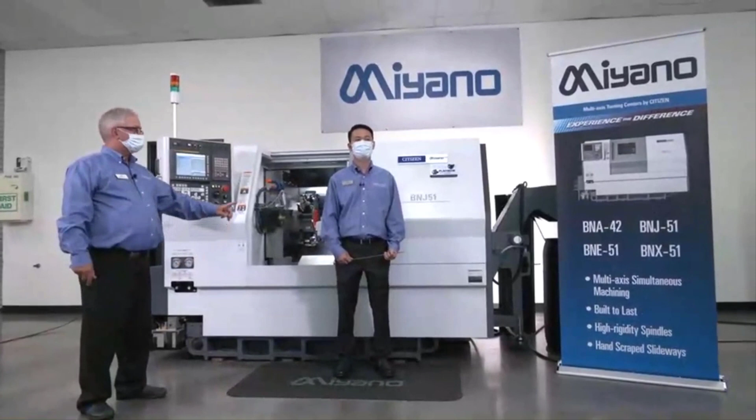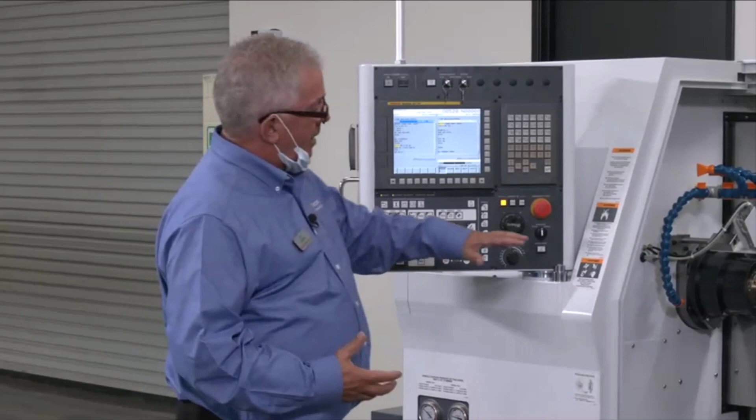Good job. So just in wrapping up, Han did a great job explaining the machine. The Miyano machine, Citizen brings this machine in ready to run, ready to go. As Han had indicated, the spindle is very rigid. We've got 2 sets of angular contact bearings in the front and a set of roller bearings in the back. So it's ready to support up to a 12-foot, 2-inch bar. We can handle that. The machine comes standard with collet noses, both the main and the sub.

Cut-off detection, so we know the part has been cut off. Parts catcher, parts conveyor, control light, and all the control functions that used to be options years ago are in there now standard. This thing is ready to go out of the box. Again, very heavy, rigid construction. We can take aggressive cuts on this machine, and very, very accurately.

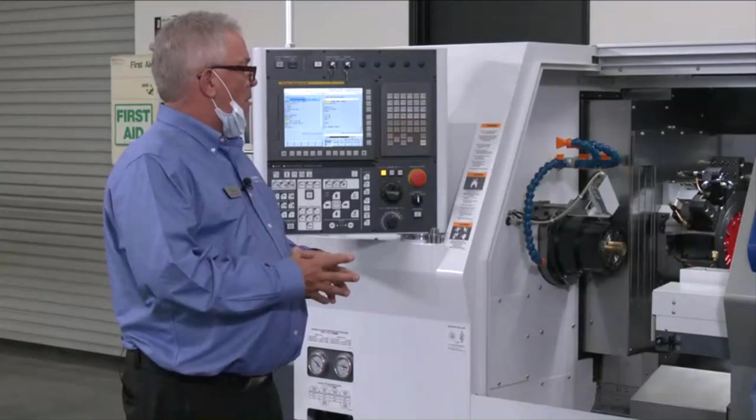So with that said, if you have something you'd like for us to look at for you, a part, we're here to help. Yeah, I know it's a very good machine. Out here in the Southern California territory, I've got machines that are still running today that go back to 1990, 92, 93, many of them still running every day. So let us take a look at what you have. We can offer a solution.